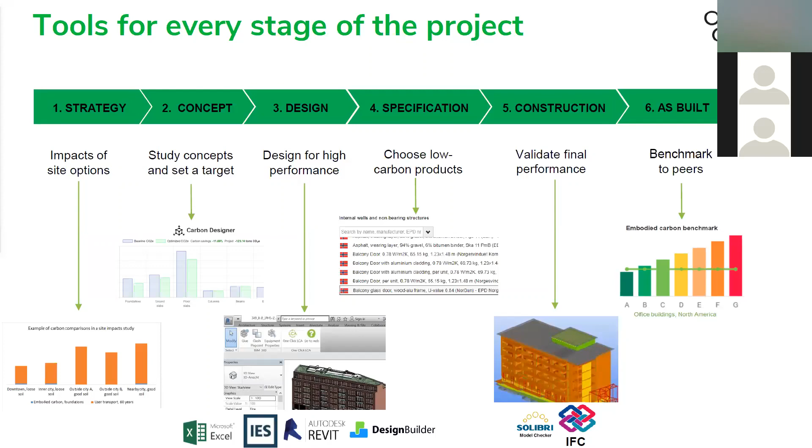Those tools are called Site Designer and Carbon Designer. From the design stage onwards it's a classical LCA software where you use design software to get the quantities, then EPD and carbon databases to get the emission factors for your project, and then multiply them automatically to get your carbon impacts for the project. Finally, you can use it to benchmark.

Obviously, certification is a big part of business for many regions. You are undoubtedly aware that LEED, for example, provides credits for both embodied carbon reductions as well as for LCA, as well as for EPDs for that matter. We do support those, and we do support pretty much any certification that has any form of embodied carbon or LCA in it.

We do integrate with different design software. If you are an energy modeler, we support the most common commercial energy modeling software packages. If you are a designer, we integrate with Revit, and if you are a BIM manager, we provide BIM management software integrations. And for everyone else, we provide Excel and IFC as exchange formats.

Embodied carbon impact of construction comes from several different stages. The digger in the mountains, as the first stage of the life cycle, is extracting raw materials, which are then transported to a factory where they are manufactured. The extraction, transport, and manufacturing of raw materials all cause life cycle impacts or carbon impacts. The transport of materials to the construction site, the installation itself, and the transport and disposal of construction waste cause further emissions. All of this is called embodied carbon, and up to the point when the building is built, it's called upfront embodied carbon.

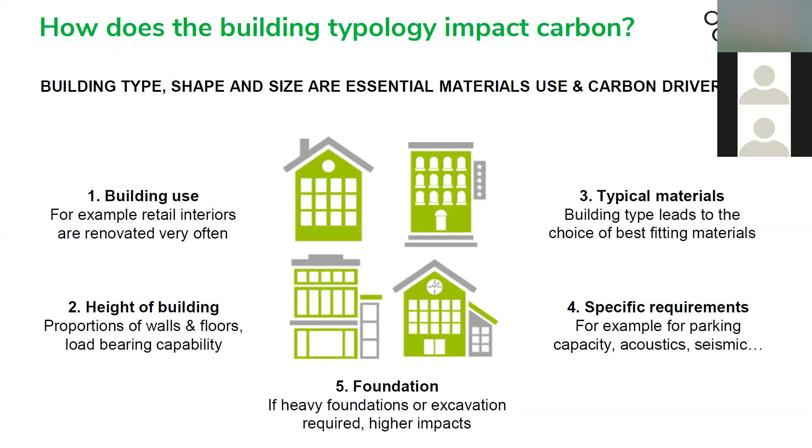And finally, although this may be to some extent a lesser problem in the MENA region, the foundations on some sites can be very heavy, which of course increases the impacts that the building will have on that site. These typologies all drive the embodied carbon of a building and make it required that you consider it from the point of view of the specific project and what you are going to do here, to be contextualized and work from that onwards.

I have here some sample buildings with similar size broadly, and per square meter impacts with just concrete buildings, from a European context. So we have residential low-rise, residential high-rise, retail, office, hotel, and education. Here we have assumed uniform renovation cycles, which does not do full justice to retail projects, which would actually use far faster renovation cycles. But you can see that just the per square meter impacts vary by almost one third between different project types. This is just to illustrate that the type of building you will build matters greatly.

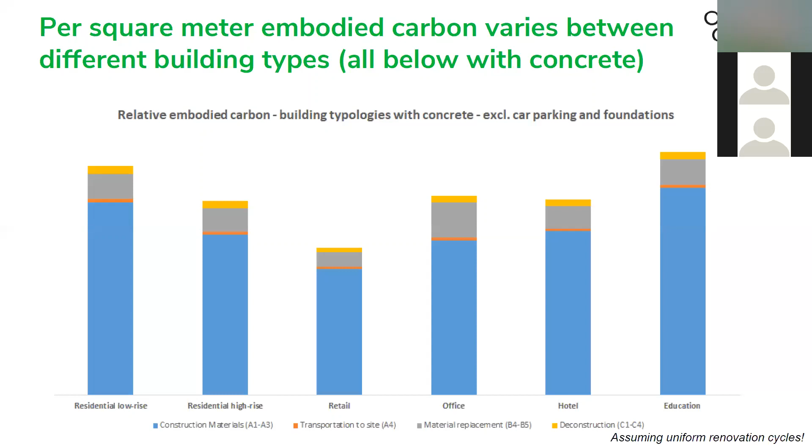And then if you look at the building impacts and where they come from, very often they come from floor slabs. The floor slabs are very massive—in every building, there's a very significant amount of floors and materials in floors. You also have high impacts coming from the envelope, not just because it's massive, but because it's high carbon materials. Envelopes in the Emirates, we can probably say a fair share of it is steel, glass, and aluminum—all carbon intensive materials.

And finally, they also come from the impacts of internal materials and building mechanical systems. The reason for this is because those materials are short-lived, so they do not actually last the whole duration of a building. If you design a building for 50 or 60 years, most of these materials get replaced not once, but several times, thus increasing their material demand during the lifetime of a building.

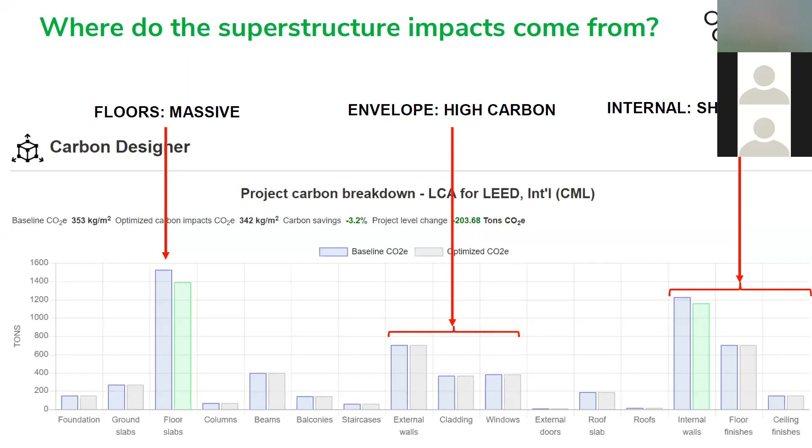If we look at the building from the point of view of year one, excluding major foundations and building systems, we can see that for a steel and concrete-based building, those two materials account for two-thirds of as-built impacts, which is not surprising.

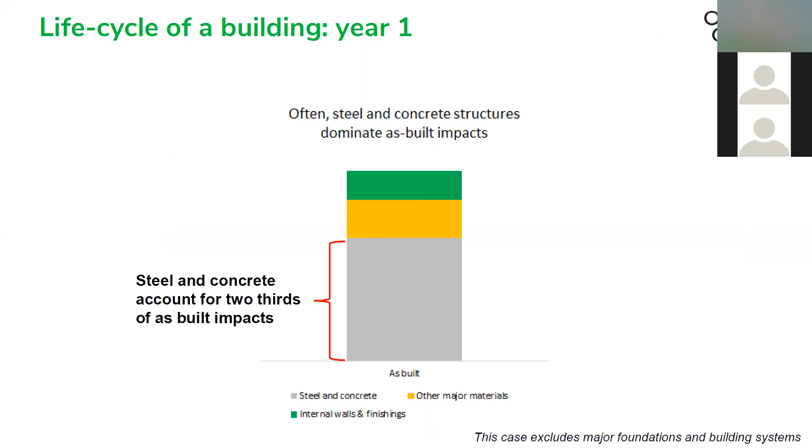These are the dominant carbon-intensive materials in all construction. However, if we start to look at it from a life cycle point of view, at year 50, we already have so many replacements taking place that the internal walls and finishings get replaced for that life cycle, that already 47% of the life cycle impacts come from those. But steel and concrete do not require any material replacement at that lifespan.

If we go to 100 years, that share grows further. And we should note that building systems are not included here, so that will grow the share of materials that are being replaced even further.

There's a question about replacement of concrete by other more sustainable solutions in the Middle East. So I don't have a study, but we have several projects which have done really well. So it's possible to reduce these impacts definitely, but you need to define that ahead of time because availability of alternative binders is constrained in the sense that you don't get them on the day you ask. You need to ask for them ahead of time because they are not always stocked.

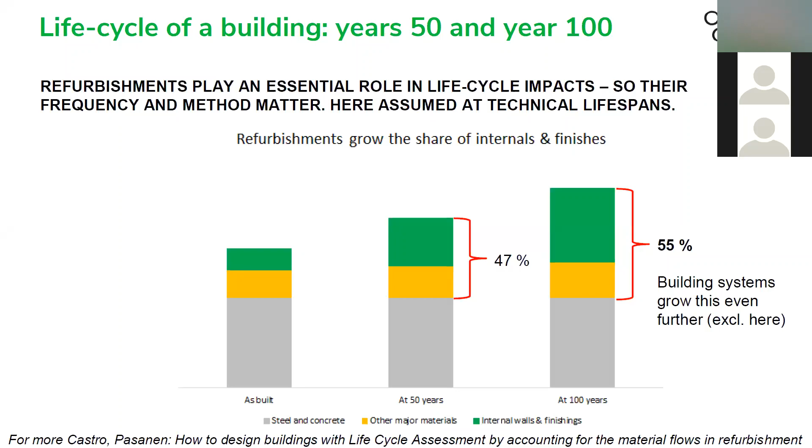Then if you look at the embodied carbon cycles in the built environment, to do this in a visual way, if we start from the basis, the infrastructure that we build around the buildings lasts for centuries, right? Then if we put the building structure up, it will last 50, 100 years, possibly longer, depending if there's a need for that building. And then we have the spaces and systems, which can last anything between 5 and 30 years.

And if the structures are replaced once, that will double their impact during that life cycle, right? So if you are a structural engineer, or you're writing a brief for a structural engineer, and the building is in any way significant and likely to be able to serve in a 100-year time span, then there's a very good case for actually requiring the materials and the structures to last that long, because otherwise you might run into the risk of basically requiring to rebuild a completely solid building otherwise.

Regarding spaces and systems, you cannot avoid tenants changing leases. So if you have a retailer who's your main tenant, they can of course change the leasehold, and if that happens, then you have to accommodate to the requirements of the new tenant. But what you can do is you can design for disassembly. So if you do design internal walls that are movable, there's a company in Turkey making them, for example. I can't remember their name right now though. You don't have to demolish them, and you don't have to buy new ones. You can just move them. And this obviously reduces the capital cost of the renovation, makes it faster, and reduces the carbon impacts of those renovations.

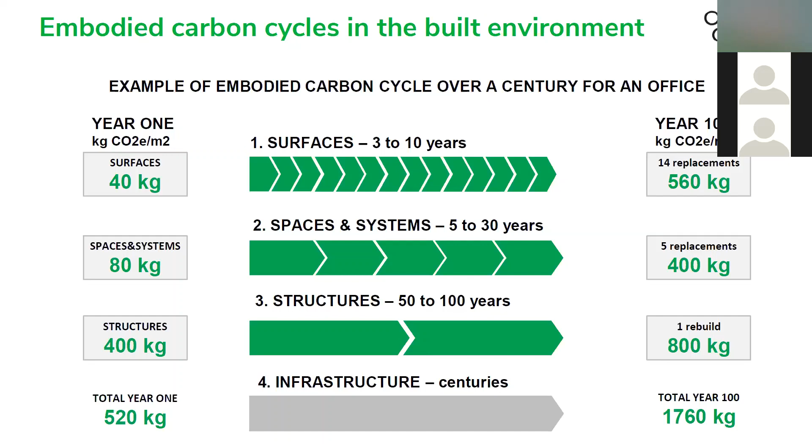One of the key findings of this report is that globally there were, at 2018, 105 regulations and rating systems that directly address embodied carbon. In this, we have only considered green building systems or regulations which are either carbon only or multi-criteria systems. We have not considered only energy systems or only waste systems, mainly because there's an infinite number of those, and if they don't by definition include embodied carbon, there's no point looking into them.

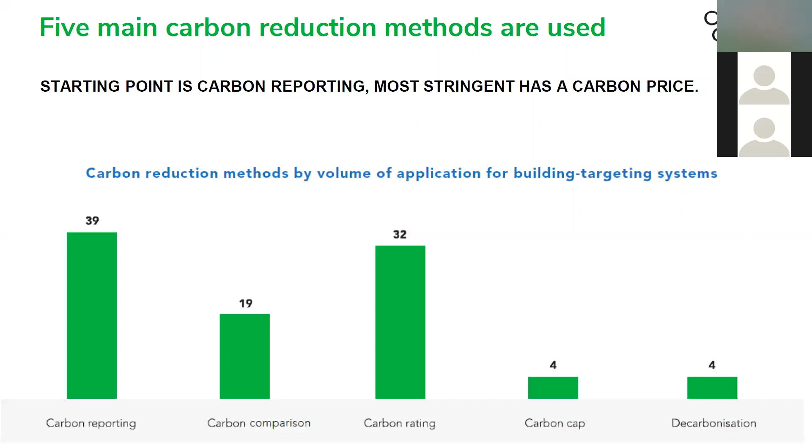Some of these systems are highly efficient. Carbon rating starts to work pretty good. Carbon caps work even more, and decarbonization, of course, works the best, because every ton of carbon you emit has a counterfactual cost.

Now, not everybody wants to start a project which is subject to a decarbonization price. So you may also make a sacrifice in terms of the level of efficiency you have in terms of carbon reduction and the level of prevalence.

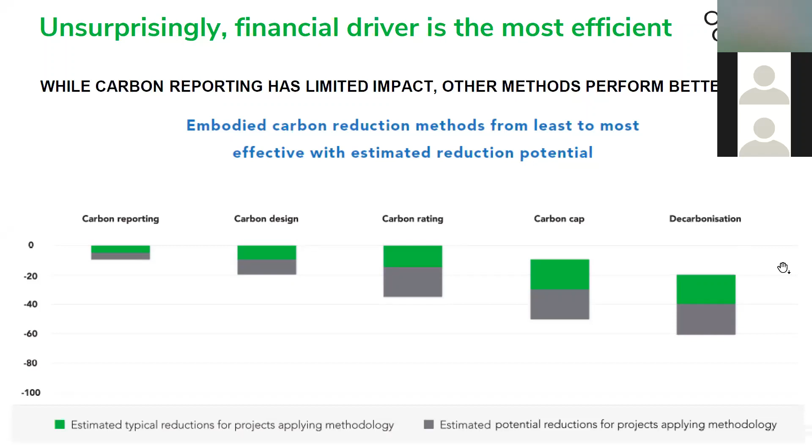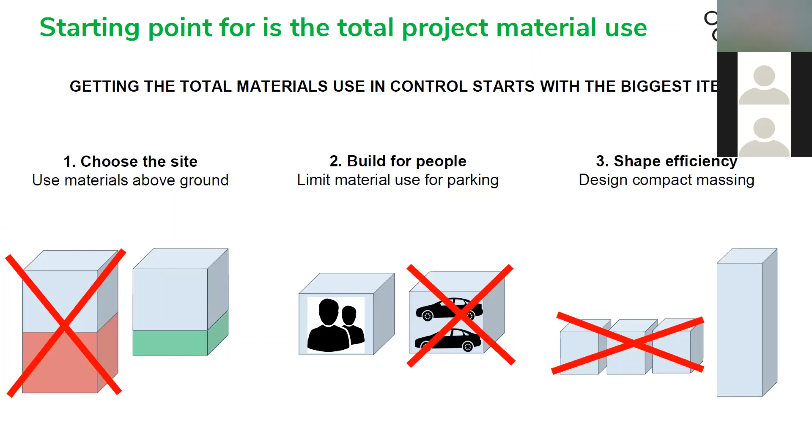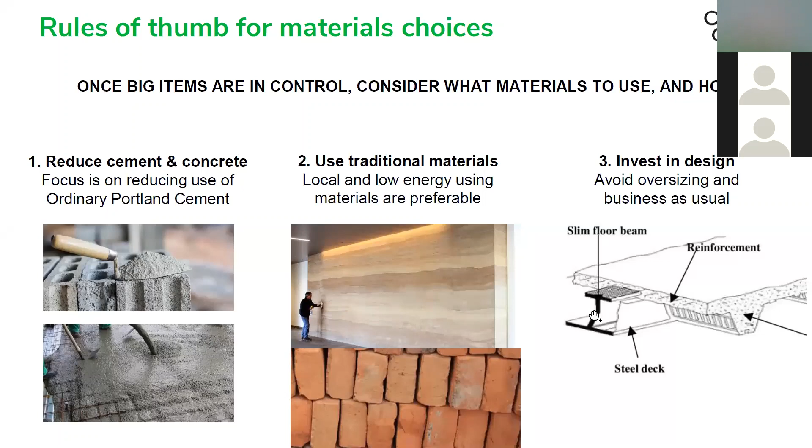Adrian Smith and Gordon Gill, architects, were recently asked to build an iconic building at the center of the Expo, as the highlight of the Expo. Everybody would expect, as specialists of super tall buildings, that these people would make a skyscraper. And they came back and said, no, we should build a park.

Why they came back with this proposal to build a park is because basically they felt there were enough skyscrapers and not enough public spaces, which is not working out for people who actually live long term in a city. So they decided the centerpiece of the Expo project should be a public park.

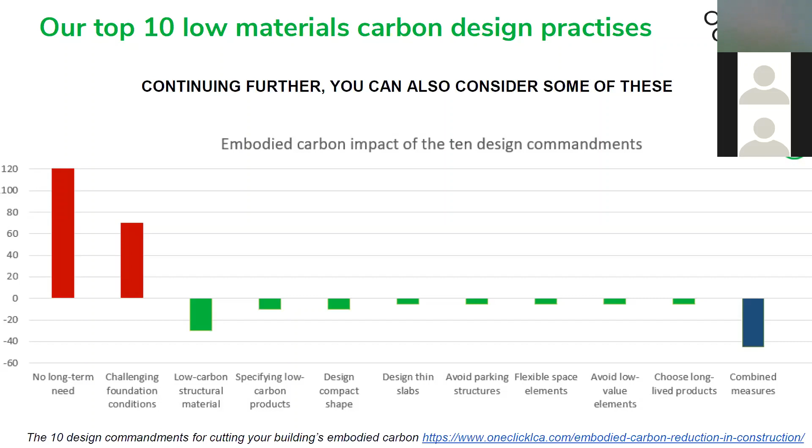Choosing long-life products is of course an option. If you do these combined measures, you can reduce embodied carbon of a building by nearly 50%. Of course the exact figures will depend on your context, but there's really significant embodied carbon savings you can achieve with design practices.

If you work with an investor, the investor should very simply set requirements and verify they are delivered upon. This has been proven to work so many times, most prominently by the Norwegian government, who has extremely stringent requirements on this. They require carbon reductions, put them in the contracts, and verify them - they assign a third-party expert to verify them.

Third, they start on carbon reductions early in the project, to avoid lock-in to a high carbon trajectory. And fourth, they understand the feasibility themselves, so they can develop a view of what can be done today, which avoids them being locked in to a scenario where they are told different things by different people and not being able to form an opinion on which of these statements holds water.

There are some insights coming out for cities releasing today. We have been working for some time on a paper called City Policy Framework for Dramatically Reducing Embodied Carbon. It will be available during today at embodiedcarbonpolicies.com. This has been written in cooperation with some of the world's leading cities, including San Francisco, New York, Vancouver, London, and others. It includes 52 policies which cities can adopt to reduce embodied carbon.

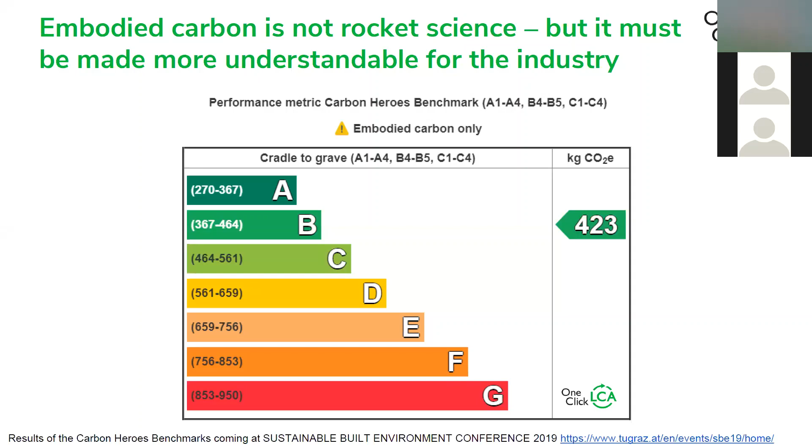There's a question from Mark Lavery, whether there's a database for carbon data available to suit the Middle East market. Most data publicly available is from UK, Europe, and US and does not reflect the Middle East market. In One Click LCA, we actually do integrate all carbon data globally. We have over 60,000 data sets, and those data sets cover everything everywhere. We do have data for the Middle East, and we also have all the manufacturer EPDs for the Middle East, as well as generic data for the Middle East. We do integrate more, so every time our manufacturers make new datasets, we do integrate them.

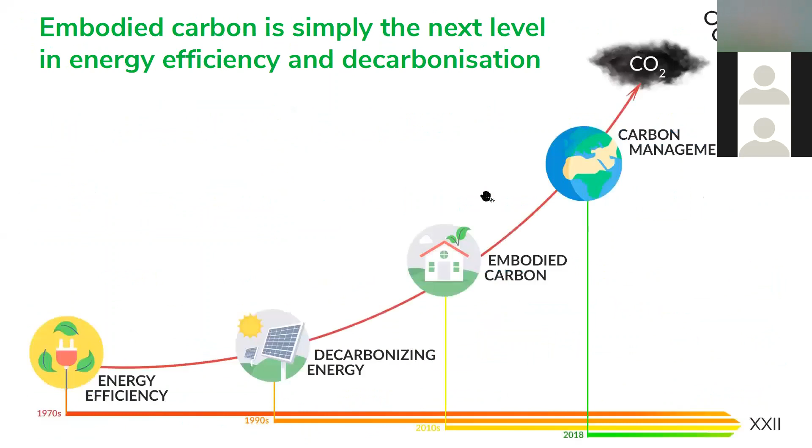There's a question whether reducing emissions and operational carbon is expensive in terms of cost. Can we capture cost savings in a tangible project to convince clients to include this in contracts? It is expensive if you do it late, like most things. So if you have a project which is at specification phase and you say, okay, let's buy the lowest carbon products we can find, without having ensured that you actually save materials, then it's no money saving anymore.

The money savings come basically from starting early, because then you can save quantity of materials. These savings typically, because labor is also part of it, and labor may not be saved because you don't replace structures altogether, you just reduce the amount of material in those structures. Typically it's below 1%.

There's a question on Expo Dubai, who has applied carbon reduction measures in many aspects, designs materials with EPDs and so forth. So far as we know, all the EPDs made for Expo Dubai are in our database. If they are not, our customer support will integrate them. So most definitely they can be used.

There's a question on if there's any software on LCA that's linked to LEED. Well, I was kind of hoping that that would have been clear in this presentation. One Click LCA comes to mind - not the free version, but the commercial version.

Another key feature is to identify hotspots and choose low carbon product types, specifications, and manufacturers. So you can use it to find the optimal balance between materials like concrete, steel, and wood. And you can use it to choose optimal specification to meet the objectives for your project. It also helps you to pick the best products and manufacturers to deliver your project while limiting the carbon impacts.

As you can see here, the results are given in carbon impacts and mass of materials. We did it like this because understanding materials efficiency is key to unlocking carbon reductions. You can't just specify low carbon products without also first only using the amount of materials that you need to use.

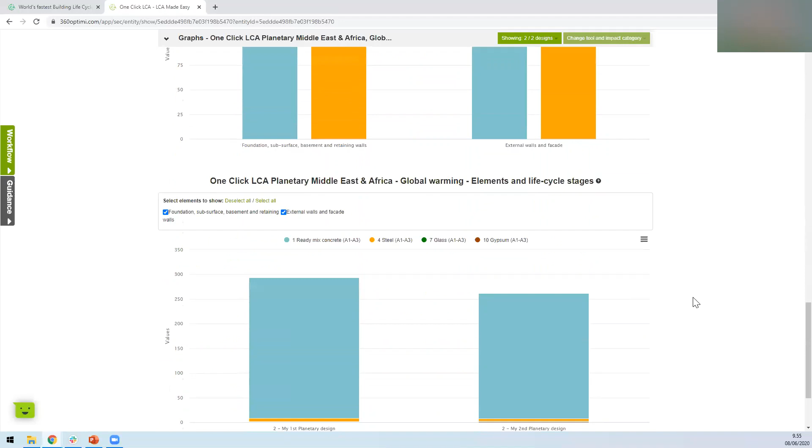We haven't used very many materials here, so there's not too much to read into this particular graph. But in terms of the elements, the biggest reduction we've made is on the foundations. Comparing the elements, external walls hasn't changed so much. So that's what the sort of comparing can be done in terms of the designs that you have.

I mentioned about EPDs previously, and I think we're doing pretty well for time, so let's try to create an organizational account so that you can also request EPDs. If I go out to my main page and click on my design...

And my name here, I can create or join a company account. So if I click here: Bionova Planetary, United Arab Emirates, and put the address here. Let's just say Main Street, and the town, let's put Dubai, country United Arab Emirates. And here you can change the social carbon cost if you like. So let's say you want to change that to local currency. This is currently set at €50, we can change that to 200 AED, and click save.

So very quick and easy to do, to set up the organization account. And now in the software, you can request EPDs from manufacturers.

So in this section, once we're in the project design, request for a new EPD from a manufacturer. So if there is a particular material that isn't in the database and you need it for your project, you can come here to request that EPD from the manufacturer.

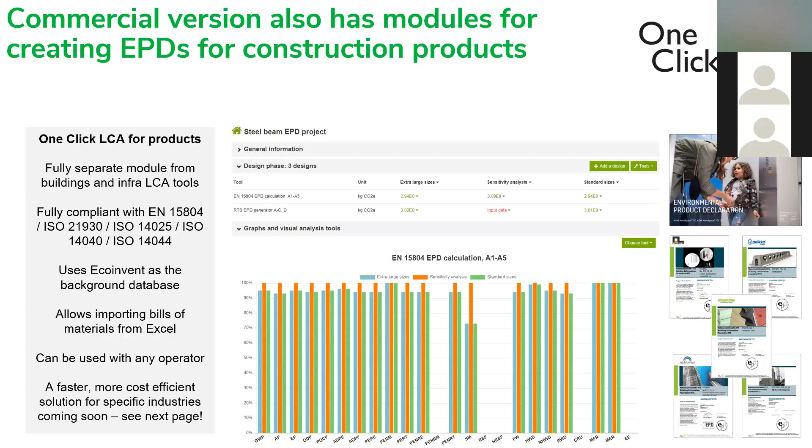I think now we can move to the question and answer section. If we have any questions, I think my colleagues Panu and Aditi have already been answering some of those. But if there are any others, I'll be happy to take them now, or perhaps Jason, you want to say a few words.

Yeah, let's give it maybe a minute or two if anyone has any questions to ask the experts here. So now's the perfect opportunity to do so.